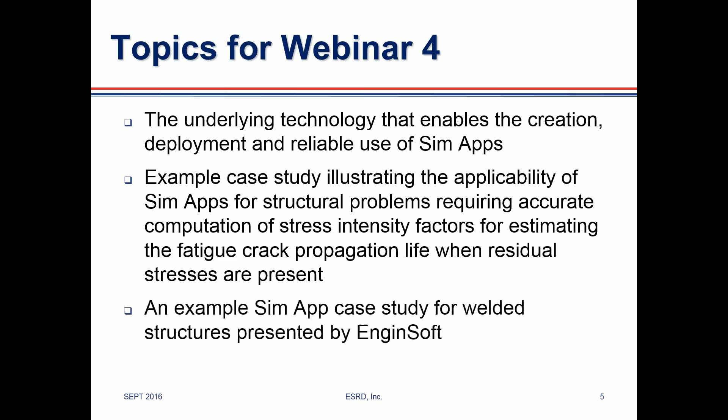Let me start with a few words about ESRD. Engineering Software Research and Development was founded in 1989, and we have headquarters in St. Louis, Missouri, in the United States. We focus exclusively on computer-aided engineering, reliability through simulation governance, that is verification through the estimation and control of the error of approximation, validation through the estimation and control of the errors associated with the selection of mathematical models, and standardization through knowledge capture and simplicity.

We develop engineering software for numerical simulation in the area of computational solid mechanics. We have been focused primarily on aerospace and defense applications, and over the last 10 years or so, smart engineering simulation apps for different industries. More information is available at www.esrd.com, and the foundation of our technology can be reviewed and understood clearly in a recent book published by our founder, Dr. Barna Szabó and Ivo Babuška, Finite Element Analysis.

What is it that ESRD offers in terms of software? We offer smart engineering simulation apps, which are engineering analysis tools developed under contract and for private licensing to industrial customers. We have commercial analysis products that provide the foundation for developing the applications. The main product, StressCheck Professional, is an advanced numerical simulation tool for FEA experts. Then we have CAE-Handbook, which is a customizable finite element analysis solution for non-FEA experts, and the Toolbox, which is a specialized desktop application for non-finite element analysis experts, and we will review briefly some of them during this presentation. And also, we offer the FEA solver technology for licensing.

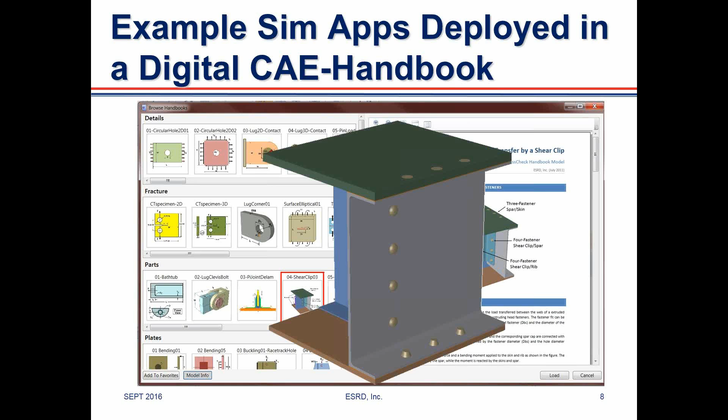This is an example of a simulation app deployed in a digital CAE-Handbook. There is a family of apps that are available in a browser style, where the end user can select one object from the list and have a document explaining what the objective of that particular object is. Once the object is loaded, in this case, what we see is a detail of a structural connection. And you see here the solid model. And then after the solution is obtained, some result will be presented to the user in a very simple to

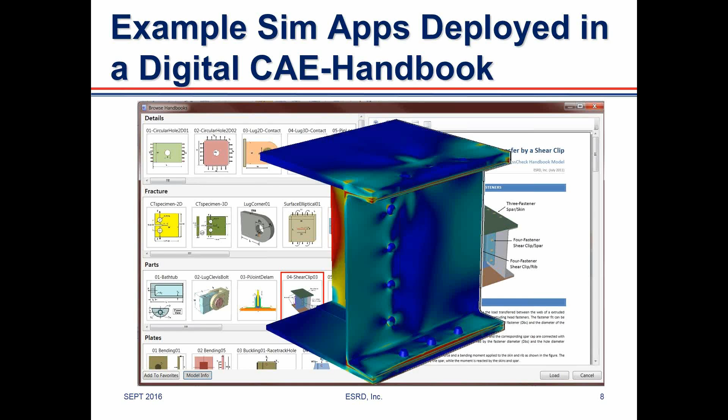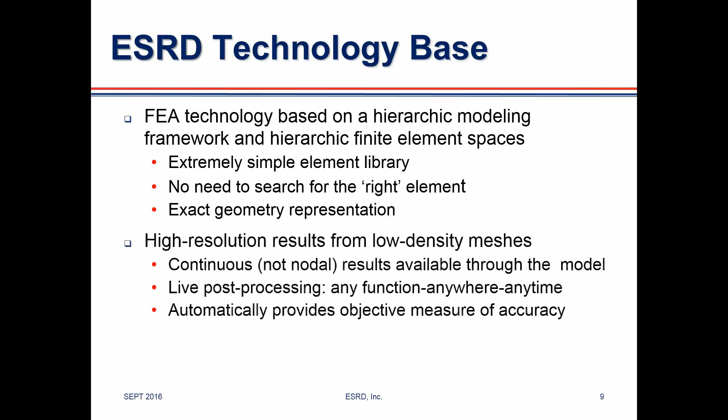use interface. The technology base on which our product is founded is a hierarchic modeling framework with hierarchic finite element spaces. What that means is that we have extremely simple element libraries where there is no need to search for the right element, and it has exact geometric representation. So the element is mapped into the geometry exactly. High resolution results are obtained from low density meshes. Continuous results are available throughout the model. Live post-processing with any function anywhere at any time, and automatic objective measure of accuracy.

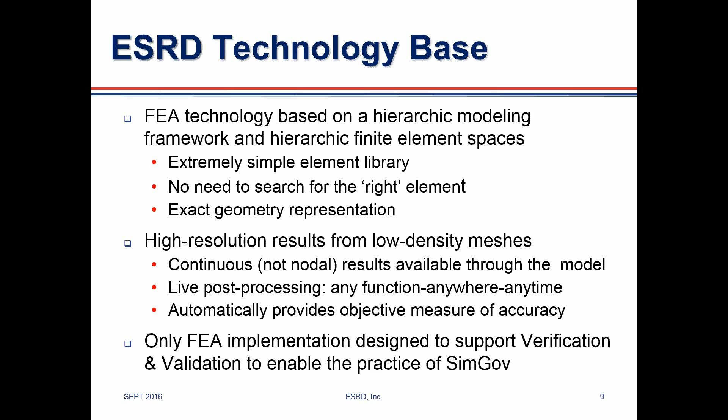It's the only FEA implementation that was designed to support verification and validation procedures to enable the practice of simulation governance. And we spoke about simulation governance also in the previous webinars. This FEA implementation was designed to obtain engineering results with minimal effort and assessment of reliability. We understood that most of the time the engineers spend in the software is to analyze and review the results. So that task should be extremely simple and always provide assessment of quality.

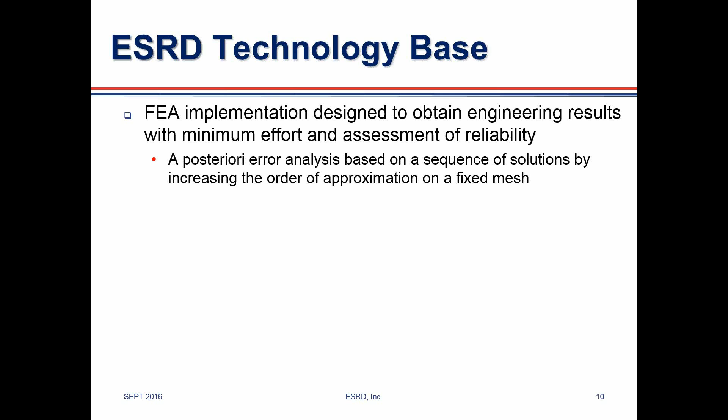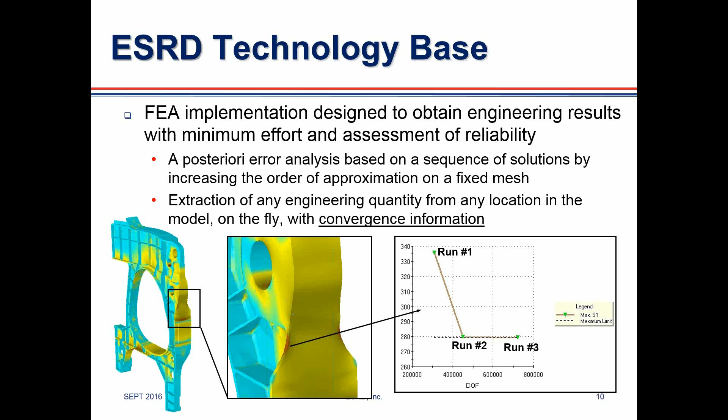For that, a posteriori error analysis based on a sequence of solutions by increasing the order of approximation on a fixed mesh is the mechanism to do that. That means the extraction of any engineering quantity from any location in the model on the fly with convergence information, as shown here in this example of a frame where the stress at the maximum location or the location of interest is computed for 3 different runs on a fixed mesh. And that shows the convergence of that particular data. Basically, it's the same mesh, and the use of hierarchic spaces allows us to increase the number of degrees of freedom without changing it.

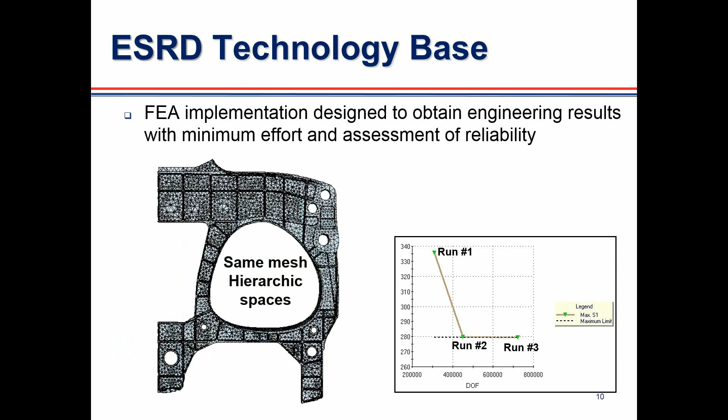Here's an example of a simulation app in a finite element analysis toolbox. We call this the StressCheck Toolbox. There are several tools, and these tools are developed for the analysis of structural details with easy-to-use interfaces, while giving the analysts confidence in the computed data by providing convergence information for all the results that are presented.

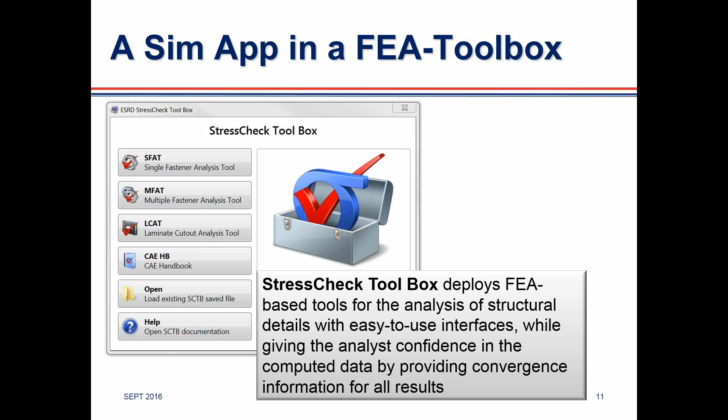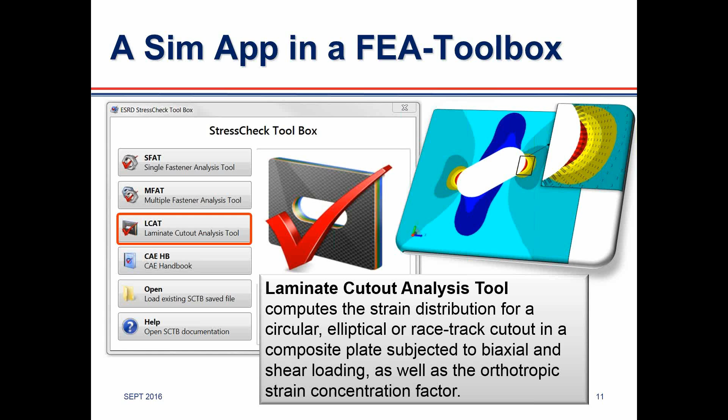For example, there is one particular I want to mention briefly, the laminate cutout analysis tool. And this tool was designed to support repair processes. When a composite material is damaged in service, the solution requires removing the damaged part, typically by performing a cutout that can be circular, elliptical, or racetrack, as shown here. And the part has to be shown to be good, even if the repair that goes after the cutout fails for certain load levels. So the tool provides that information in a very simple to use interface for design engineers when they may have to make decisions on how the repair is going to be performed.

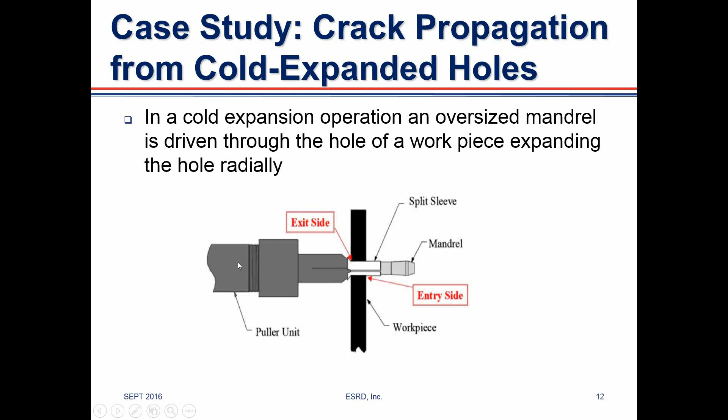What I'd like to present in more detail today is a case study of crack propagation from cold expanded holes. For those of you who are not familiar with the concept of cold expanded holes, a cold expansion operation is simply inserting an oversized mandrel, as indicated here. The black object here represents the workpiece. This is a mandrel that is inserted into the hole with a sleeve, and when the mandrel is driven out of the workpiece, the part deforms radially, and residual stresses originate because the elastic stress distribution following the local plastic deformation of the expanded material near the edge of the hole compresses the plastic zone, creating a state of residual

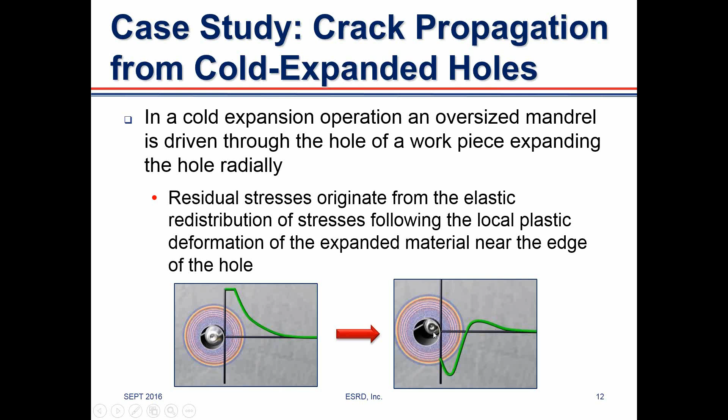stresses as indicated here. The significance of this residual stress field is that cold expanded fastener holes provide substantial increase in fatigue life by reducing the rate of crack propagation that may initiate at the hole. Here you have a cross-section of a plate where the hole has been cold worked, and what we have been observing in practice is that cracks at cold expanded holes evolve from the mandrel entrance side. And that is the area which is more difficult to detect. So the mandrel entrance on this side, exit on the other, and if the crack has the chance to form, it will happen at the entrance side.

What happens typically is the outside surface is the one that is exposed, let's say the skin of an aircraft, and the inside is not easy to access. So cracks may grow and become critical before they are detectable. Analysis processes are very complicated for this type of problem, even for experienced FEA analysts, which makes it ideal for

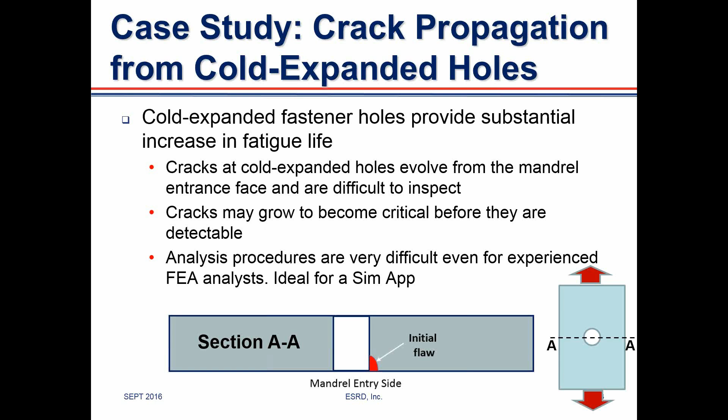a simulation app. Just to give you an example of the class of crack propagation that may occur, this is from an experiment in which marker bands were used in the spectrum in order to be able to trace the crack front from an initial flaw on the entrance side. So this is this portion here magnified, and what you see is that the crack front grows substantially on the inner side, the not visible side of the part, before it actually penetrates and is visible from the outside.

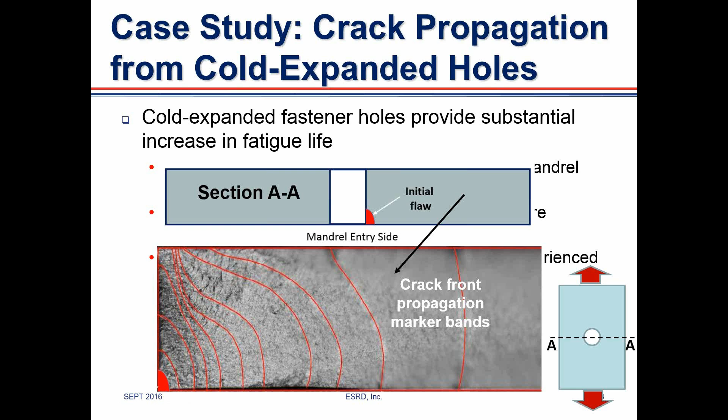In some occasions, this shape can be even more radical than this, and the crack can achieve critical size before even showing up on the outside. So the question was how to manage this in a way that is efficient, that is fast, that is accurate, and that provides reliable results.

So a sim app was developed to incorporate the beneficial effect of residual stresses due to the cold expansion in order to provide accurate computation of crack propagation lives. The idea was basically this: given the initial crack in a cold expanded hole, the spectrum loading, the material properties typically characterized by the modulus of elasticity, Poisson ratio, and the rate of crack propagation as a function of the stress intensity factor, and the residual stress distribution.

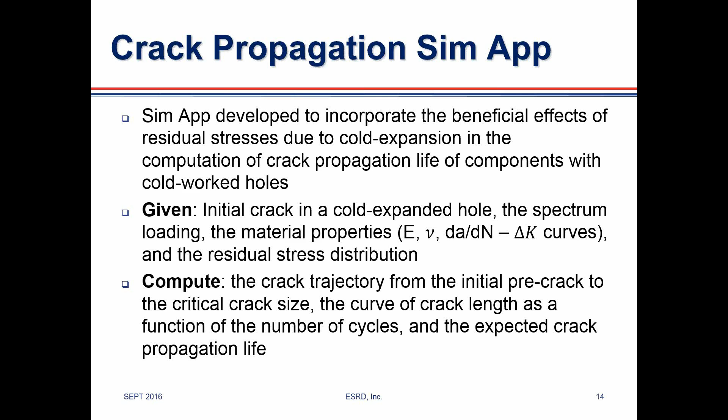The goal is to compute the crack trajectory from the initial pre-crack to a critical size, find the curve of crack length as a function of the number of cycles, and the expected crack propagation life. So what we have done in this project was develop a simulation app that has a very simple interface and is organized as follows. In the first sequence of input, the dimensions of the components are entered.

In this case, we are simply showing a specimen type, but any kind of component can be incorporated into the system. For example, in this particular case, we have two options, straight holes or countersink holes, and depending on the choice, the user enters the information that is needed. This was one of the prerequisites, to only show the input that is necessary based on the selection, so that the user never gets confused about what is important to enter and what data is irrelevant for the problem.

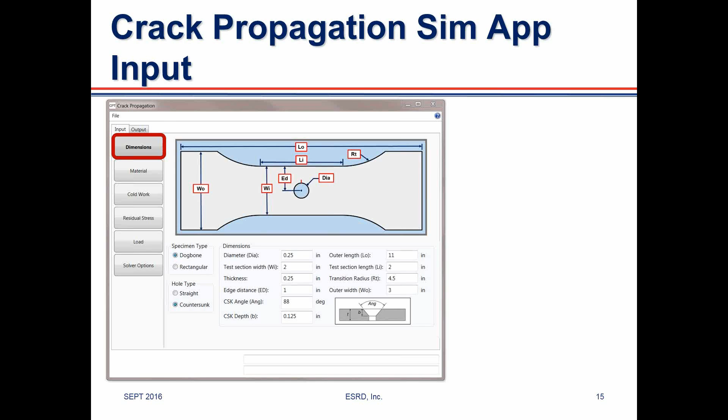Once the dimensions are entered, the material properties are selected, and one of the requirements for this application was to have the ability to peruse and browse material databases that provide the information that is needed. As shown here, this is a typical da/dN versus delta K curve for different load ratios.

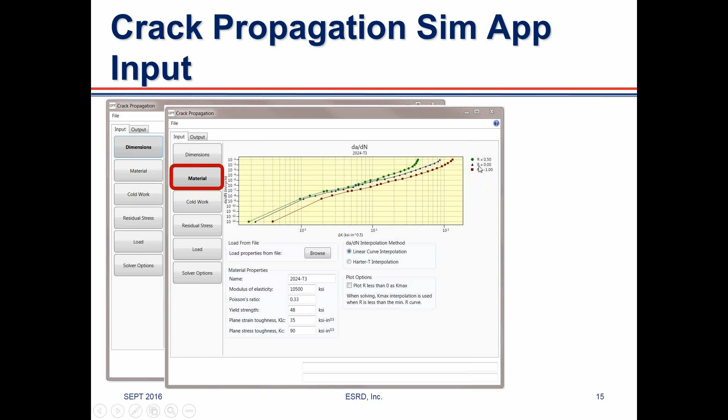Once that information is entered, another feature of the application is the ability to produce residual stress profiles for a particular hole configuration. In this case, the application will solve an elastoplastic problem using incremental theory of plasticity, and the user can specify the level of expansion, diametric interference, the material properties of the mandrel and of the plate, and the characteristics of the elastoplastic material properties.

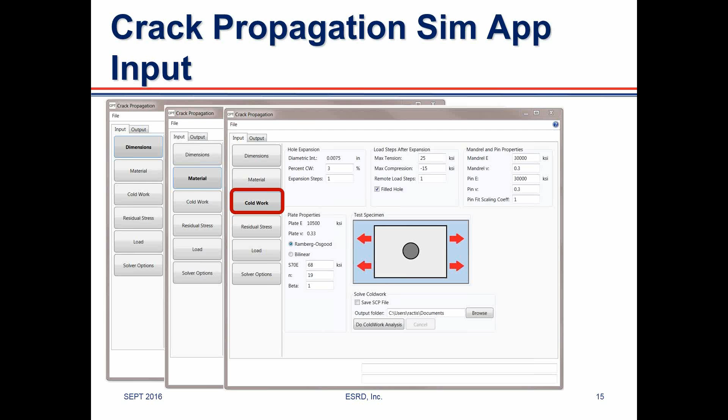One of the requirements that was important for this project was to recognize that when holes are cold worked, they're typically filled with a fastener. And if some overload events occur during the life of the part, this overload and underload, that means positive or negative in terms of tension or compression, can change the field. With this module, what we accomplish is giving the analyst the possibility of testing those hypotheses. If they detect that there is an important overload or underload event in the operation, they can recompute the residual stress distribution due to those.

The residual stress module allows the user to either import an existing residual stress from experimental data, what is called the user-provided residual stress, or a database residual stress. This is a database that is produced by the U.S. Air Force and is available at large for use. It is a very extensive database of different materials, different hole diameters, different plate thicknesses, and different interference levels that are available for general use.

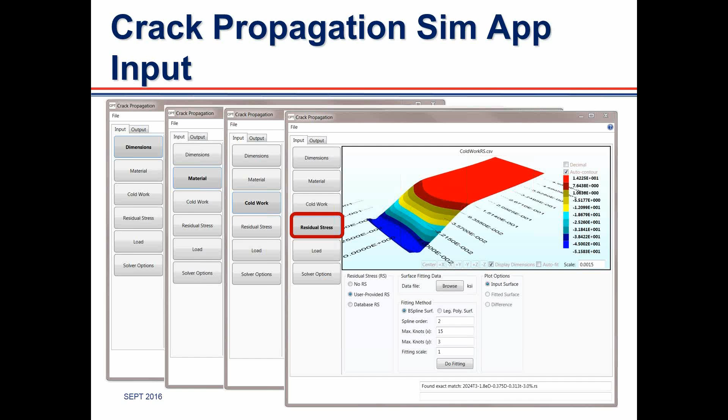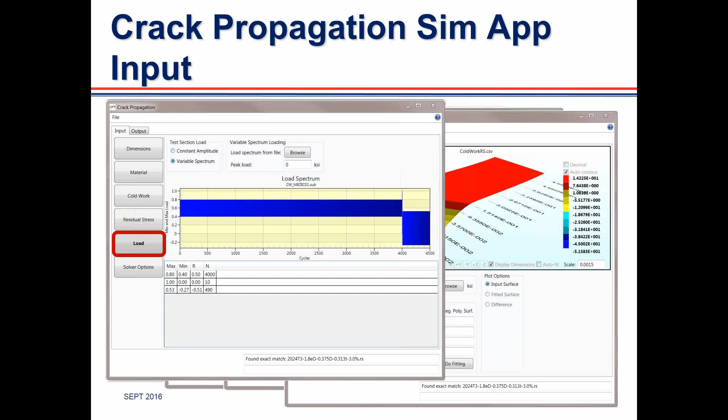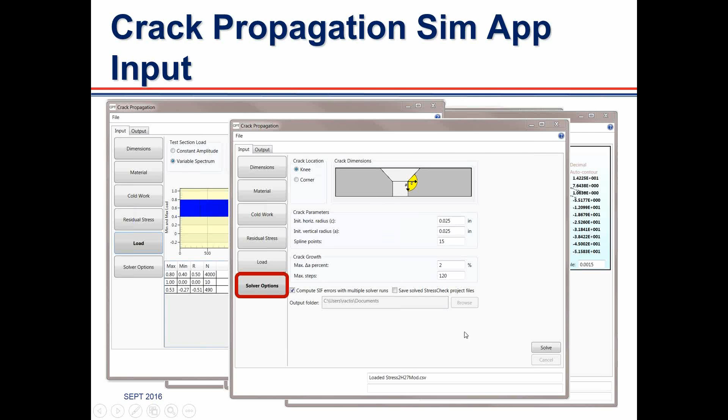Once the user selects that, he defines the load. In this case, we are seeing a type of spectrum load that can be loaded, and the program will use it. Then the solver options are indicated here, where depending on the selection in the dimensions page, it will show where the crack can be placed. For example, it can be in the knee of the countersink hole, or it can be in the corner. Once all the information is there, the solve button is hit, and the program will perform all the necessary operations. What we are showing here are the typical outputs.

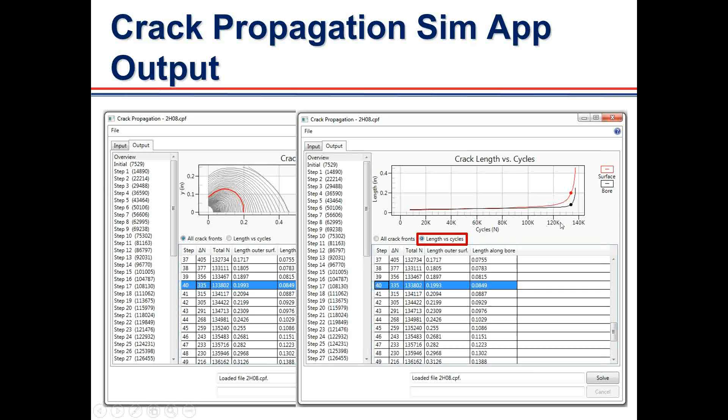Another option that is available is to zoom in into a particular crack front and then get all the information about the stress intensity factor, the range of the stress intensity factor, the corresponding R ratio at the location of the crack front, and the rate of propagation at that particular point.

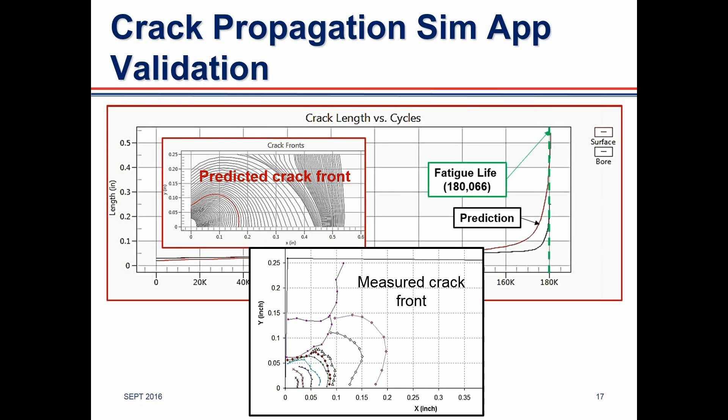In summary, this simulation app was developed and deployed in support of a program for the integration of residual stress analysis of critical fastener holes into the U.S. Air Force depot maintenance. The Sim App accounts for the beneficial effects of residual stresses in the calculation of fatigue life of cracks in cold expanded holes. It's a simple to use, accurate, fast, and reliable tool for expert and non-expert analysts.

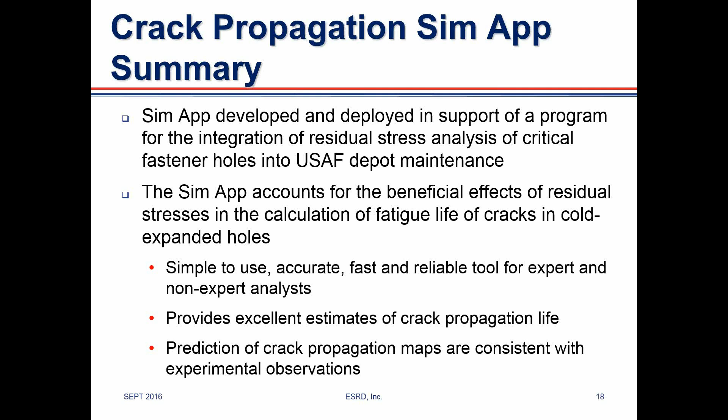It provides excellent estimates of the crack propagation life, and the prediction of crack propagation maps are consistent with experimental observation. And importantly, it also allows very quick assessment of different options of different cold working procedures to get the life that is of interest in a very simple to use tool.

Hello everybody. Now I'm here to present a particular structure, the welded node, which is used in offshore environment and also in a civil engineering environment to connect together hollow tubular section and open shape section joints, braces, all together. In particular, the structure we are going to present here is one used in the offshore environment.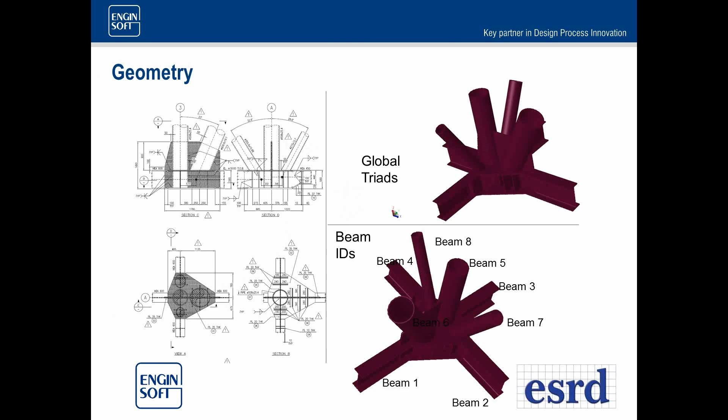Here we can set the loads and the constraints, and here we have the parameters. With this part, we can completely define the geometry configuration we want to analyze, and with the loads and constraints, we can set the particular configuration of boundary condition we want to analyze in particular.

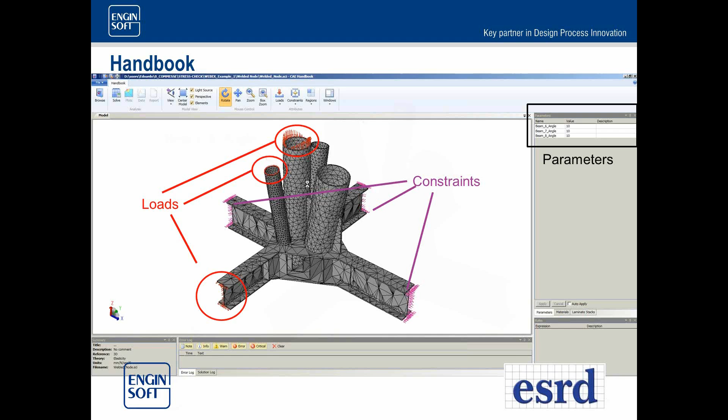The handbook allows the user to define just the geometry you want to analyze and the boundary condition you want to analyze without having the problems of defining the mesh. And in particular, in this case, for example, we want to analyze the variation of these three parameters, which are the angles of the three incoming members, the 6, 7, and 8.

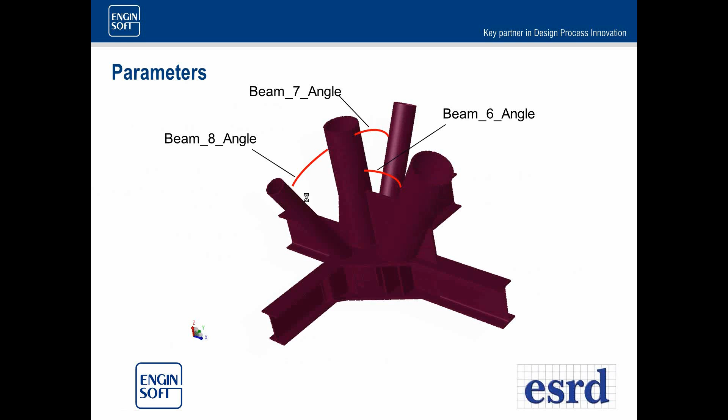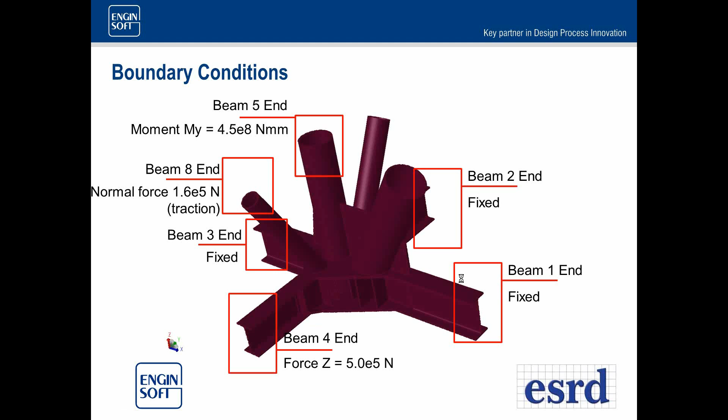And these are the boundary conditions used for the resolution of the problem. So we have a moment on the beam number 5, and we have some tractions on beam 8 and 4, and beam 3 and 2 and 1 have been fixed.

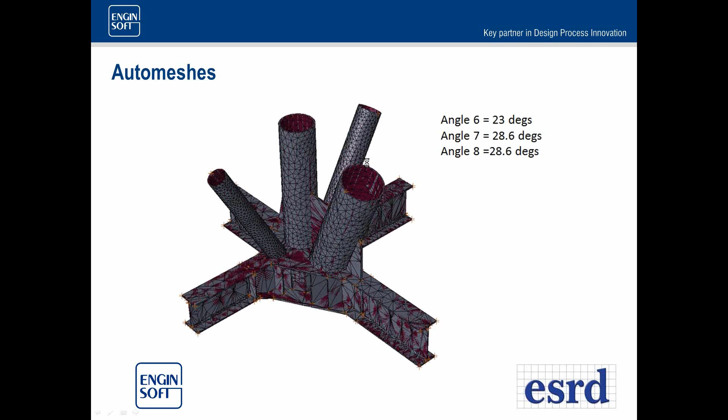In particular, as it's visible here, the handbook doesn't require the user to define the mesh, which is automatically generated by the code. And this takes advantage from the fact that using the P technology, we don't need to have a particularly fine mesh in order to get accurate results. And these are three different geometrical configurations analyzed.

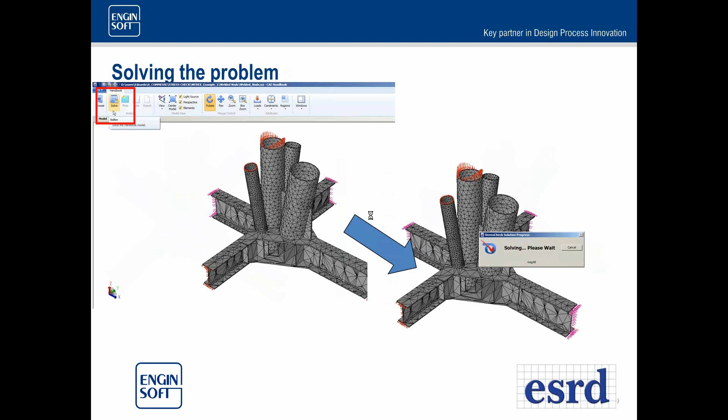As I said before, the user just needs to configure the particular problem we want to analyze in terms of loads and constraints and geometry, and just needs to press the solve button in order to get the results. So it can have very accurate results due to the fact that the P technology doesn't require a very fine mesh in order to get the results.

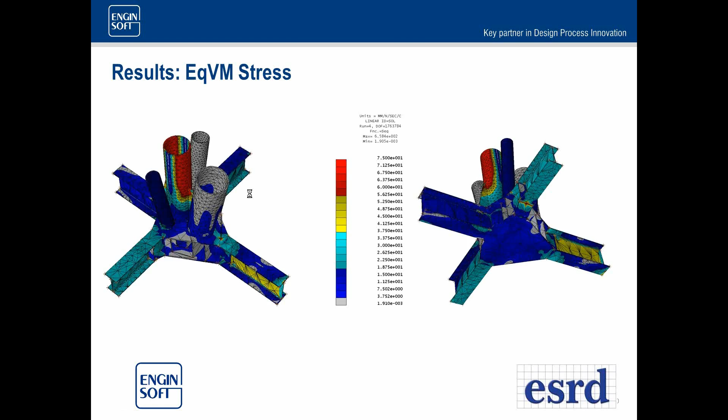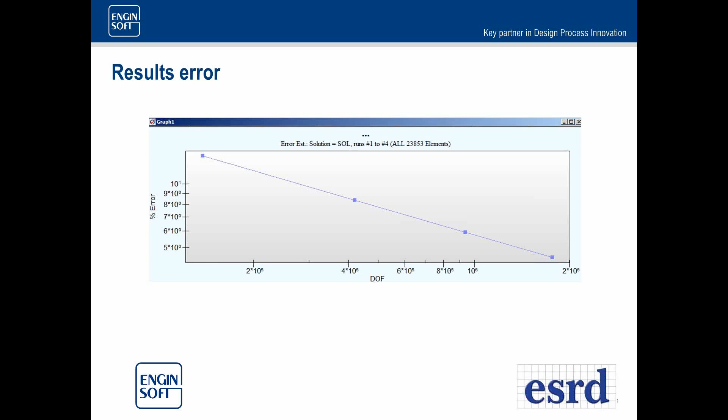Thank you, Eduardo, for the presentation of the work that you have been doing.

One important consideration when developing simulation apps for cases like this, for example, is that the user is not involved in any decisions related to how to define the mesh density or how to apply boundary conditions, which is typically the situation of the target user of simulation apps, who is not an expert in numerical simulation. And that is done here by EnginSoft. They understand the problem well, they can define it, they can encapsulate it, and they can deploy it for use

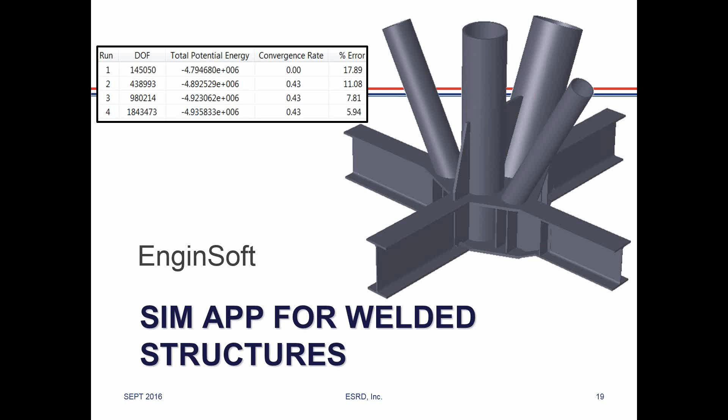for non-experts. So I'd like to provide a brief summary of the main technology differentiator for simulation apps that our technology brings. Solution verification with automatic quality assurance is an inherent capability which is combined with direct, accurate geometric modeling. Also, one important consideration in the technology is that the idealization is separate from the approximation. That allows a simple and minimal element library to capture topology, and simple meshes to construct, check, revise, and use for simulation apps. It's feasible to use solid elements throughout, regardless of the thickness of the part.

High fidelity multi-scale analyses are possible on the same mesh. High fidelity results for low resolution meshes are also possible. And what is very important is the ability to provide continuum solutions throughout the model, and the ability to perform live dynamic post-processing of results. And the most critical aspect for simulation apps is the objective measure of quality without an expert on call.

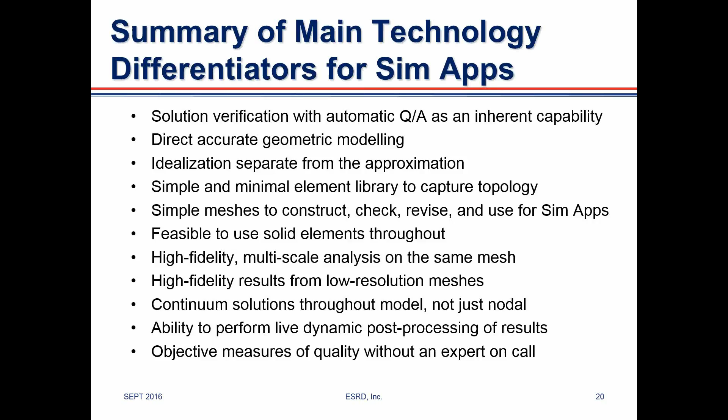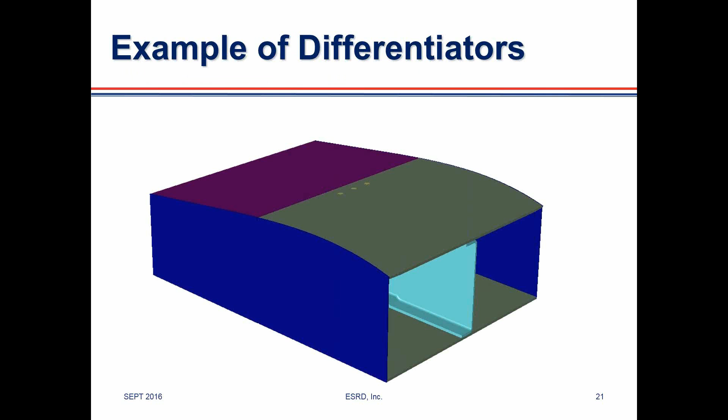For example, let's consider a small section of a portion of a wing of an aircraft contained between two ribs. If we zoom in into one of these areas, what you immediately notice on the right corner is the assembly consisting of several parts. In the center here, we have a spar that is connected to the other member by fasteners. In this case, there is a shear clip connected to the spar web by 5 fasteners. The other half of the shear clip is connected to the web of the rear spar of the rear frame. This frame in turn is bonded to the skin at the top and the bottom. And then the front part is also bolted to the spar by means of these fasteners that you identify here.

Now, what is interesting to note about this problem is the scale. So we have a structural level, we are looking at a portion of the structure, and fasteners, which are very small in comparison to the rest of the structure. And to make things even more interesting, we are interested in assessing the influence of clearance on the result. The size of the clearance is very tiny in comparison with anything else.

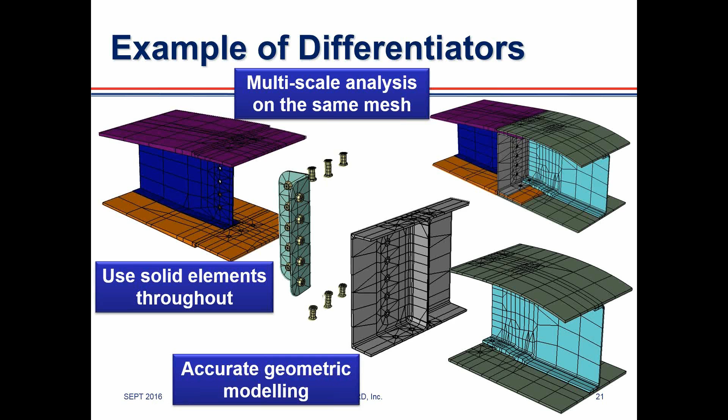This is an example of the type of mesh that we're referring to, and as an example of a differentiator, we are capable of performing multi-scale analysis on the same mesh. So we have the structural scale level and the local detail level of the stresses around the hole, including the effect of clearances. We use solid elements throughout. There is no shell-solid combination, which typically is a source of problems and confusion that only experts can handle. And we have an accurate representation of the geometry. As you can see, the mesh maps exactly onto the geometry.

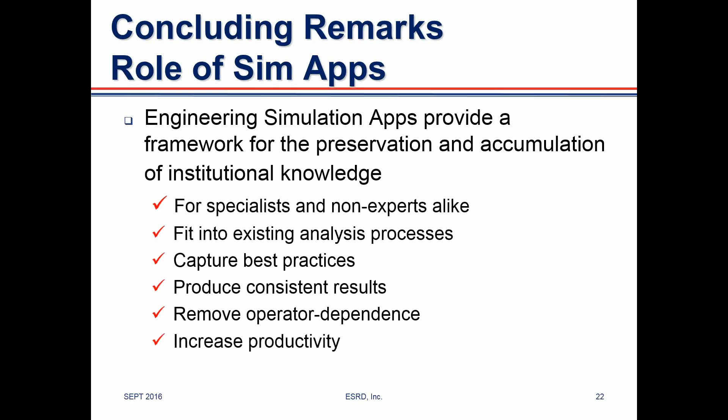So as concluding remarks, in the role of simulation apps, they provide a framework for the preservation and accumulation of institutional knowledge. They are for specialists and non-experts alike, fit into existing analysis processes, capture best practices, and produce consistent results, removing operator dependence. The benefits are making difficult classes of simulation problems easier, more accurate, and faster to solve by the specialists to support increasing complexity of products and demanding design cycles.

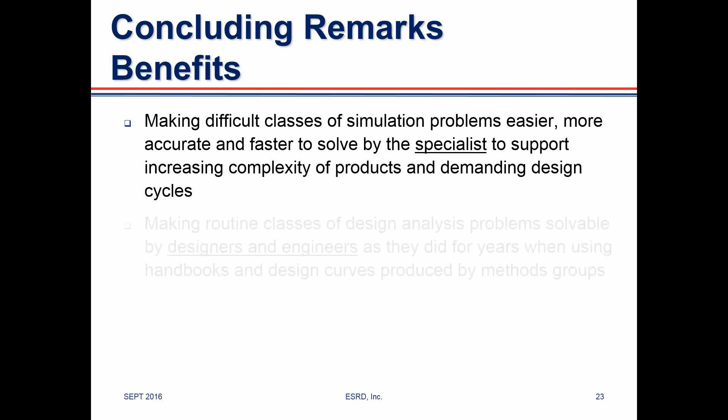Also, simulation apps make routine classes of design analysis problems solvable by designers and engineers, as they did for years when using handbooks and other design curves produced by methods groups or regulation organizations. And finally, which is also very important, is empowering the new engineer to be productive sooner with access to reliable tools that have captured the institutional knowledge and the best practices of the organization.